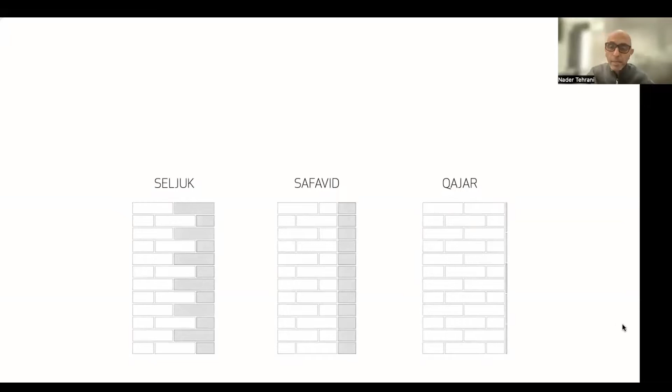I was once asked, what does all of this have to do with my own personal history as an Iranian? And I had little to offer at that moment, but in looking more deeply at the history of the Seljuk period, the Safavid period, and the Qajars, I discovered an interesting relationship between structure and skin, and the ways in which structure can essentially evoke ornament itself through the inner workings of its structural constitution in the Seljuk period, how in the Safavid period that structural layer becomes a skin, and by the time of the Qajar period, literally just becomes a tile. These were important evolutions because they also show a transformation in ethic.

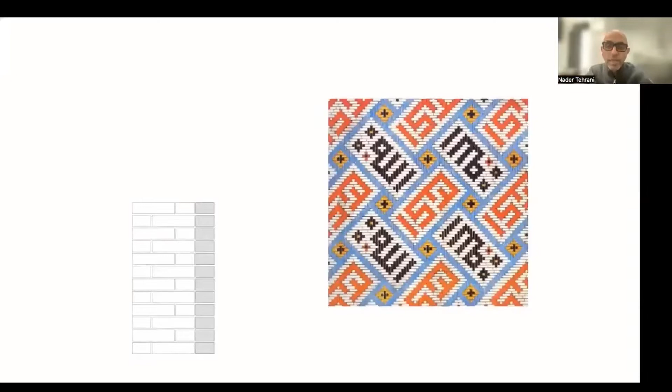In the first phase, the calligraphic ornament becomes an alternative to figurative representation of the Western world, and during the Safavid period essentially takes on certain colors and different modalities. And then by the time it gets to the later period of the Qajars and beyond, you can even see the grid of the tile being completely independent of the constitution of the wall itself.

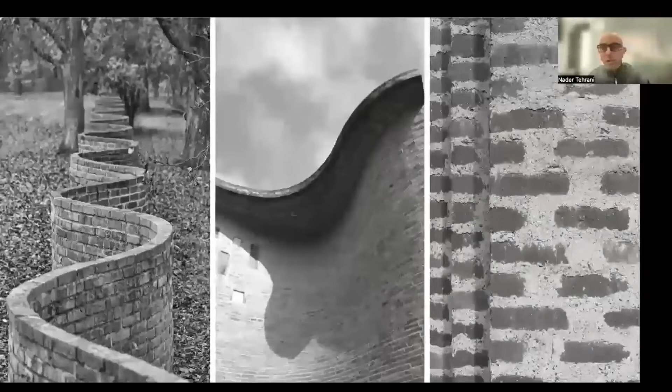All of this composed of raw material, a resource from the earth itself, and of course here refashioned in the sinuous serpentine walls of the University of Virginia and the Dieste walls of the Atlantida Church in South America. And here to the right, the infamous bonding system that shows how sometimes the mortar is the key protagonist rather than the brick itself.

And this became an idea for us to develop an approach towards means and methods where we're not just designing the image of the building, but beginning to refashion the way that we build, which is very much at the core of these workshop activities, to rethink a certain material, but also the labor processes. In traveling to Venezuela, we discovered tiles, blocks, and bricks, and they became the precondition for us to work with: the tiles on the roof, the bricks on the side wall, and the blocks on the front facade.

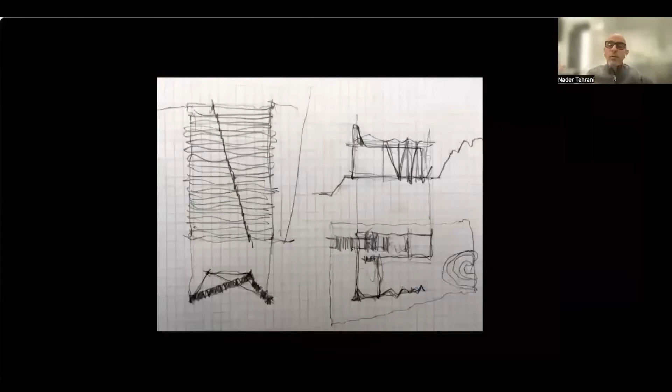And recognizing that there are really two very different ways of thinking about figuration. On the left side, you can see that the figures that emerge from the brick are completely independent of the bonding system, whereas the more abstract and sinuous evocations of figure on the right emerge directly from the relief work within the brick itself, and we wanted to participate in both modalities.

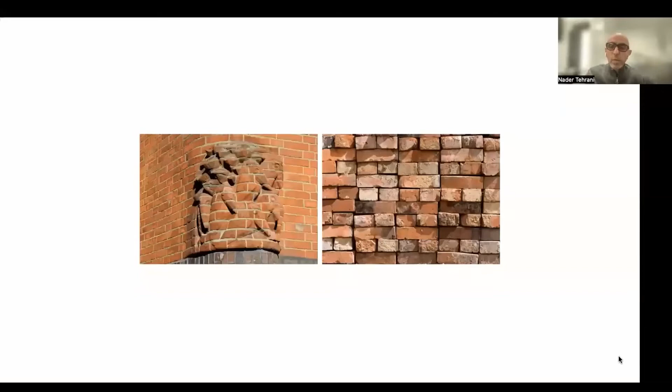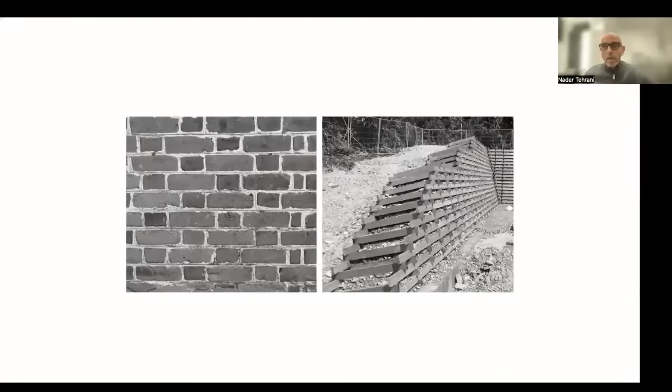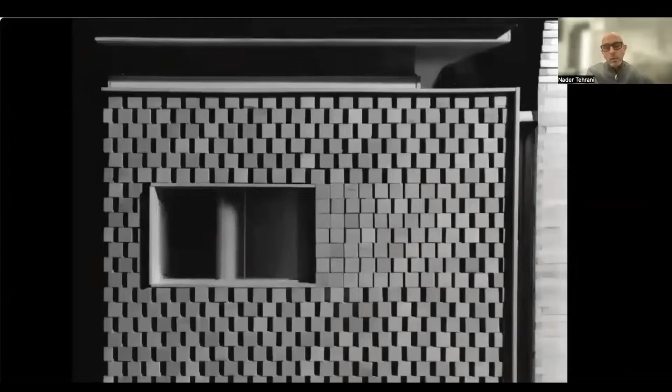But importantly, by interpreting the mortar as a variable condition, we discovered what we called the variable bond, where we oscillated the mortar line between a running bond and a Flemish bond to produce a gradient, as it were, that could slip and slide and produce conditions of porosity and rotation where solid walls become more transparent.

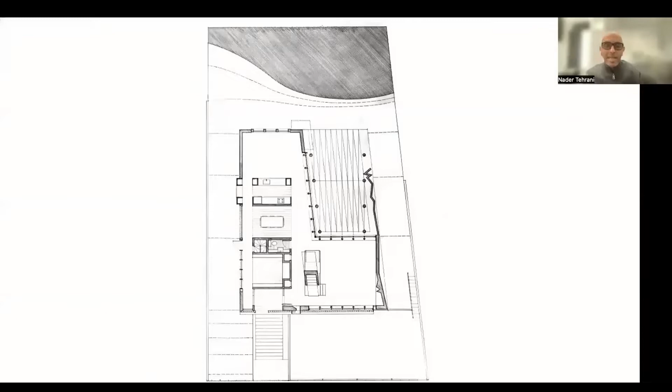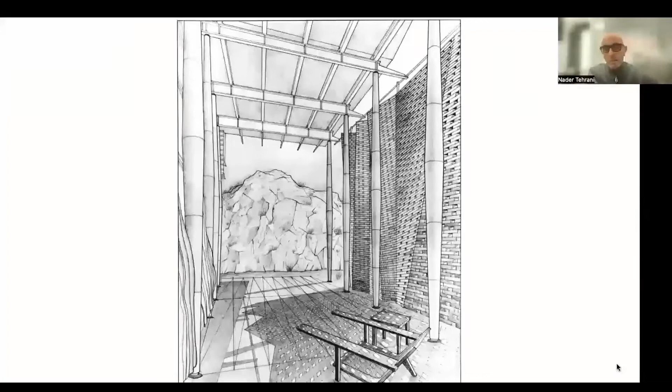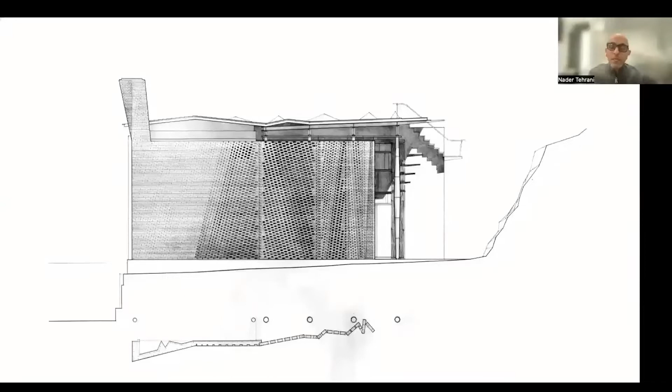And this was an important moment in developing Casa La Roca, a house dedicated to a court whose view is of an existing rock some 20 feet tall in the back garden that needed some shielding from the neighbors to the right. That folded wall on the right-hand side really is the topic of this discussion, because we had to come up with a tectonic constructed around the fold itself, minimizing the cuts of brick while giving it lateral bracing through the folds. All of this in a house dedicated to a promenade that goes up the building to the roof to get a view of the valley of Caracas below.

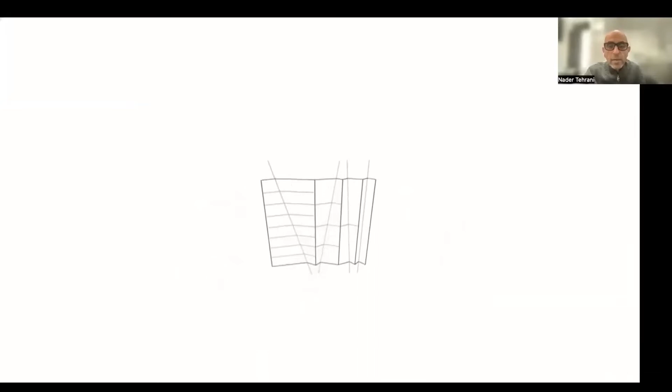So the folding emerges from a diagonal bonding system that is able to expand and contract parametrically, as it were, to produce the side elevation. By doing this, the regulating lines are essentially constructed on the diagonals, therein constructing an integral relationship between geometry and construction itself.

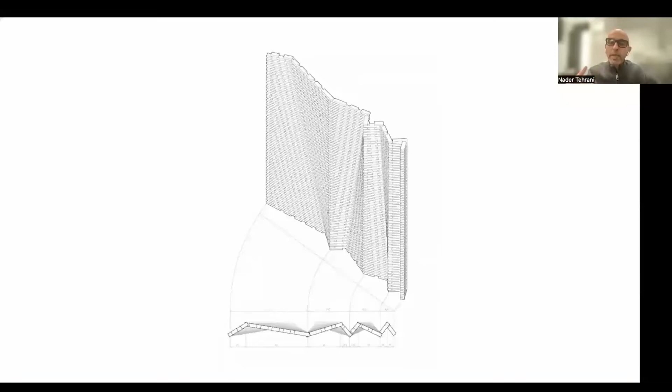Note that the geometry of the bottom is exactly the inverse of the geometry at the top, as the diagonal line essentially pixelates a ruled surface going from the bottom to the top. And by doing so, allows for the passage of air and light into what is essentially a laterally braced wall. The premise is constructed around the development of certain points in a running bond system here, and by expanding and contracting the mortar line, the production of air in between.

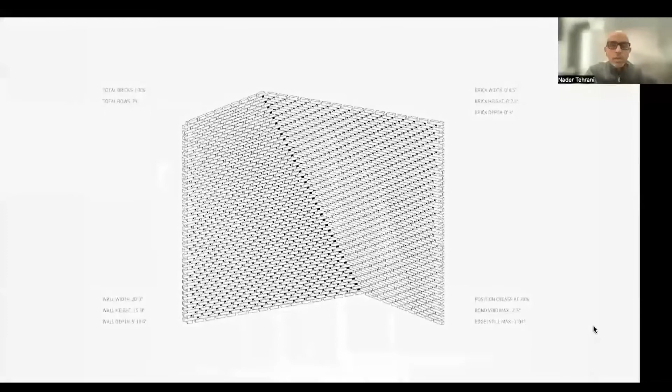The wall then is allowed to migrate, bend, fold back and forth as needed. And essentially, the constitution of the wall is then described by a structural skin. And so the curtain-like effect is not merely representational, it is constitutional to the wall itself. And so there is a sense of its diaphanous figure, but the reality is that it's absolutely rigid and structural

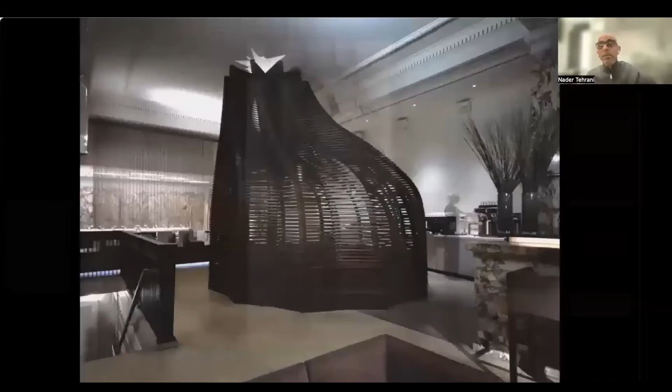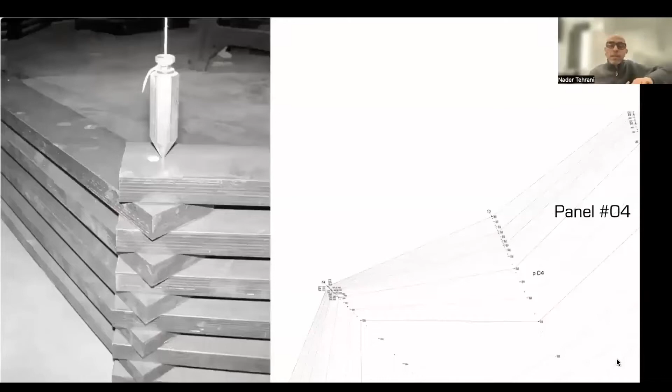and static. The house, never having been built, was then translated actually not into a terracotta system, but a wood system in the hookah den for Mantra, a kind of jali screen that has a star-like figure at the top and almost a circular figure at the bottom, for which we ourselves developed the means and methods, essentially by pinning the drawing up on the ceiling, dropping plumb bobs, and getting within a 16th inch of a tolerance as we stacked, glued, and screwed the pieces together of plywood, but really of a masonry logic.

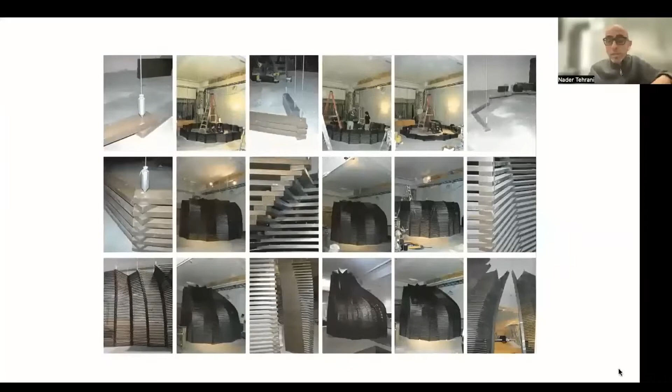And realizing that by doing that, we had cut off over $100,000 of the budget that the contractor had reserved for this structure. We had built this ourselves. It was our first construction job. It was our first full-scale mock-up. That was the building itself. And so our adventures into means and methods and fabrication really started at this point.

But this had to also be translated into a larger scale. At the scale of buildings here, we were interested in translating our obsession with terracotta, clay, and bonding into a building here, the Tongxian Art Center, where the figures of distortion are informed by the necessity for slopes for drainage, for the Venturi effect of a chimney, or the need for skylights, or the circulation that goes underneath a stair.

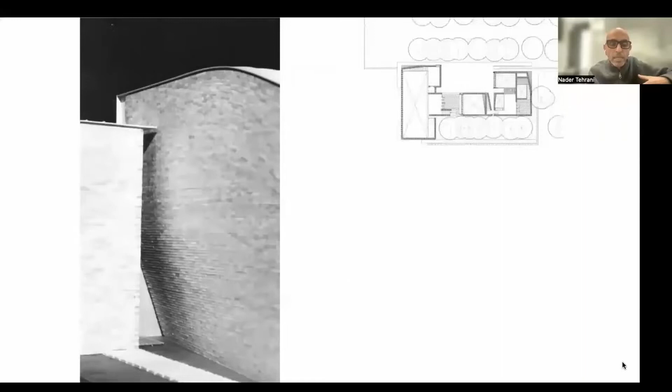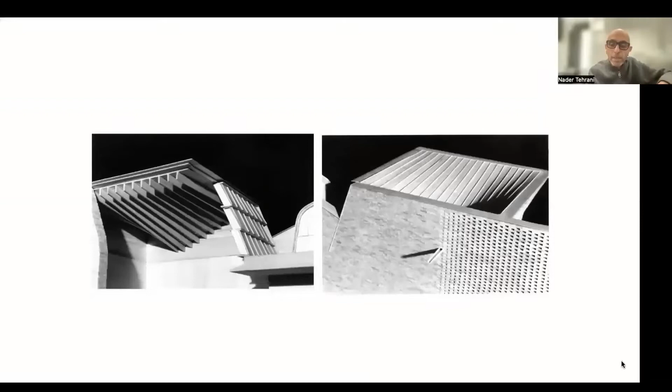For a complex that is just outside of Beijing, a series of studios, galleries, and courtyards, the full extent of this variable bond was exercised here, really focused on the minimal spaces that one could carve essentially out from underneath the stairs. As they rise, the headspace underneath gives way to some of these spaces of circulation underneath. In turn, roofing drains also find their way into downspouts and spouts that exit the building in different ways, using the bonding system as a trigger for their tectonics.

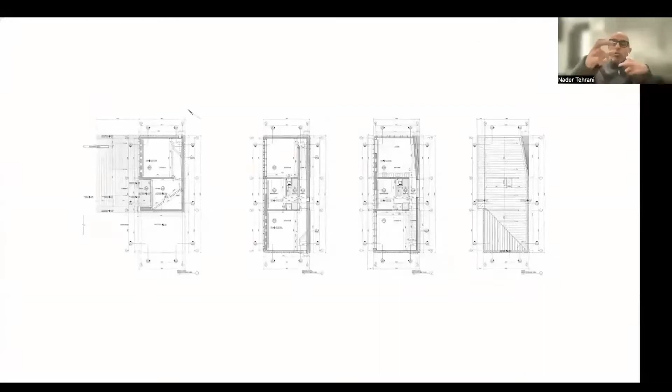The actual building that eventually got built was only the gatehouse, a structure that is essentially 2 studios and a staircase, and was built around the Roman model, where the brickwork becomes the formwork for the insulation and the concrete, and then gets stacked up accordingly.

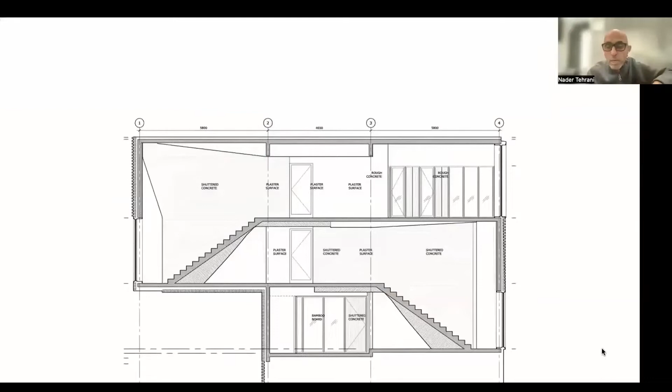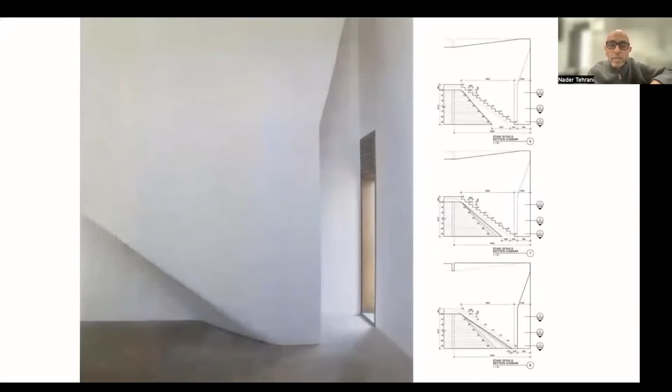And so the gate effectively becomes an incomplete cube, carving out the passage of the threshold on one side, and mirroring essentially the promenade that is the diagram of the circulation going up the building, allowing for the corridor and the stair to occupy the same space. So one weaves in a figure 8 from one side to the other side, constantly going around the underbelly of a stair and then up the stairs to the final destination of the roof, where the common area is that overlooks the gardens.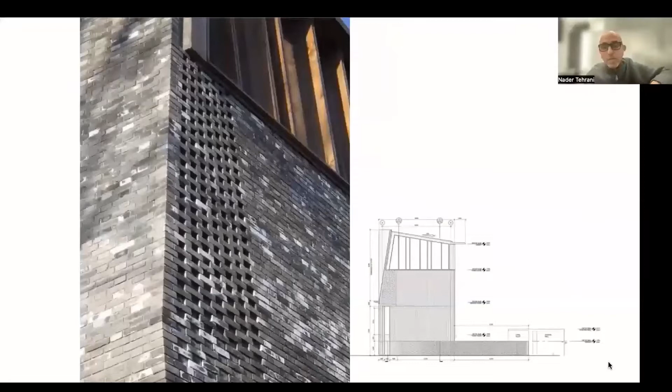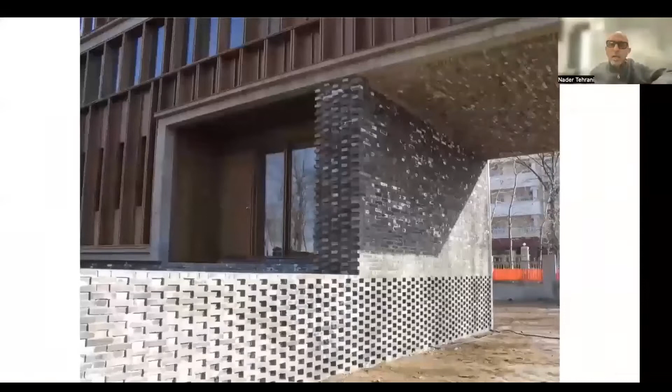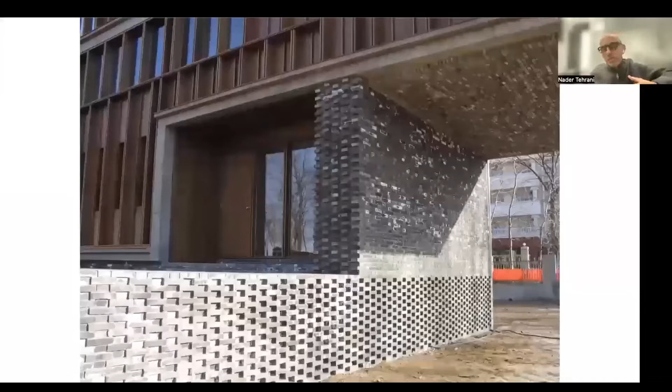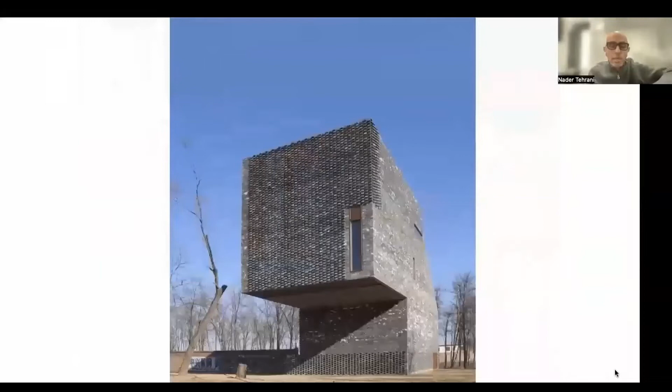And here then the figure is made clear, such that the compression of the variable bond system tilts in relationship to the roof itself, the necessary slope it requires to expel the water out onto the garden side. And here, recognizing that this is not in fact merely a brick building, but really a brick skin that is the formwork for a concrete structure, allowing for this composite structure to cantilever over 20 feet in one direction, and using the Flemish bond to excavate voids out of it for the mechanical systems underneath, among other kinds of distortions that it requires as it figures itself in the landscape.

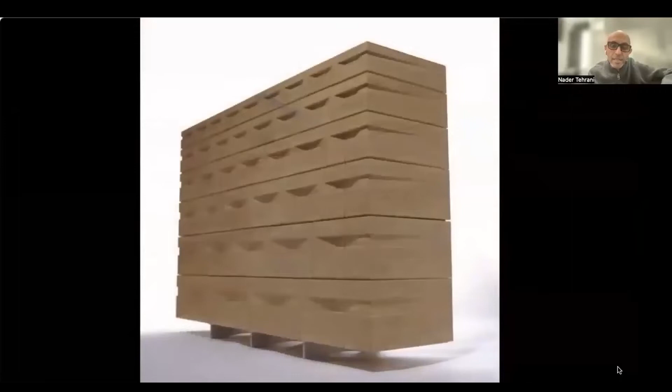The idea of this masonry system, of course, we've used as follies in different ways here, just as a little exercise, a dresser that we designed concurrently with that conceals the structure only to reveal the running bond masonry system of the wood that magically cantilevers out, using the logic of masonry to do such.

Behind all of this is a premise, what I call the tectonic grain, and it's something we borrow, let's say, from nature here in the context of a zebra. Its striping is acquiring a certain meaning in relationship to its torso and legs. Of course, everybody knows that this is not actually how the grain works in a zebra. In fact, the striping is always perpendicular to the limb as well as the torso, and the architecture of it is in turning the corners between the two.

But what you and I do as architects is artificial, and so we are constructing grains constantly, and our architecture is always in a state of debate between the actuality of construction on the one hand and the image, the representation thereof, within the context

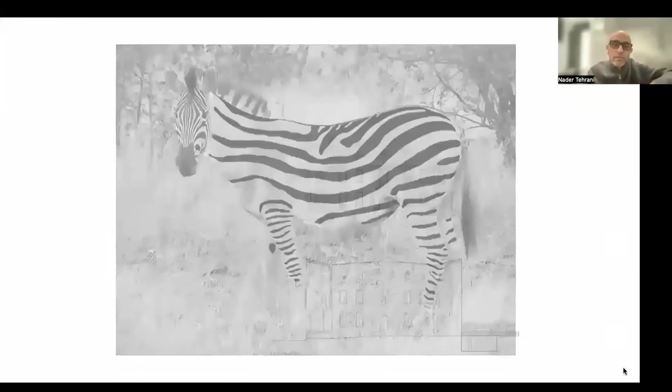of buildings. So this brings us to the Rock Creek House, which, interestingly enough, was a traditional Neo-Georgian house depicted above. A family wanted to stay in the house as it was expanding. They went from 1 to 2 to 3 kids and simply wanted to remain in the neighborhood and remain with their friends.

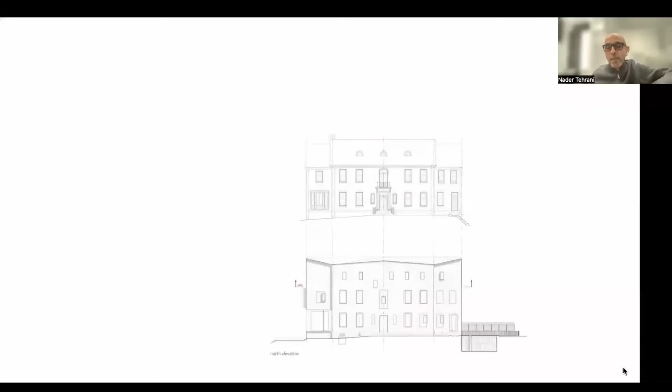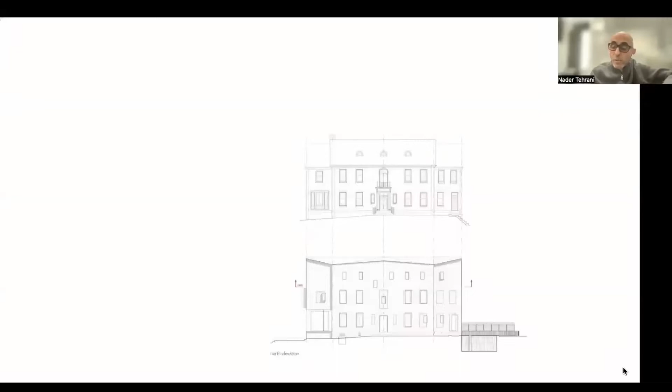And so to use the attic space as an addition. But to do so, they wanted to also excavate southern exposure on one side and use the excavated brick of that southern exposure to build the facade of the north. So essentially a kind of cut and fill operation. So the load-bearing brick construction of the north maintains a vestige of its original image with its windows more or less intact in place, a slightly new roof line, of course, occupied by the new attic.

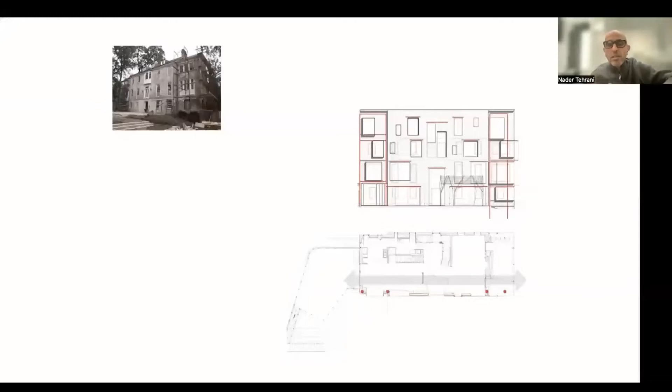But in contrast, the whole southern wall is taken over with a lot of steel, almost like a Frankenstein, it's a curtain wall that takes over on the south, allowing for what is ostensibly a very porous relationship with interiors, the random figures of which correspond to the exact new distribution of bedrooms and living rooms and staircases and so forth. And so these two characteristics of the building in brick, one in load-bearing condition, the other one in curtain wall with a side elevation making that transition.

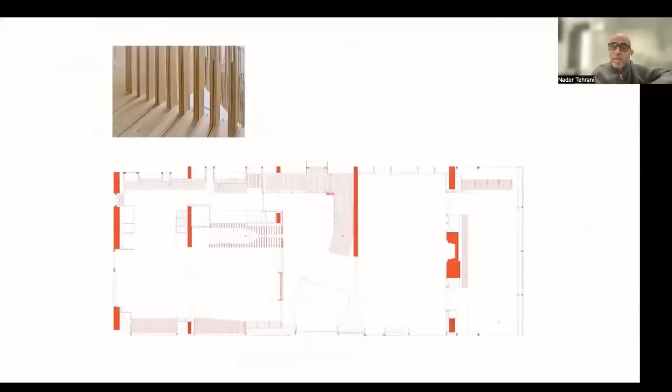Allowing also the millwork of the interior to come into full exposure from the landscape side. The building then is composed of certain structural walls, almost like party walls between its different sections, and the millwork is part of that tectonic grain. It extends that logic north-south, allowing the light from the south to come all the way through the north. You can see it through the pickets of the railing with the kind of flat stacked panel work on the east and west sides. In a way, they emulate what the brick is doing through wood construction.

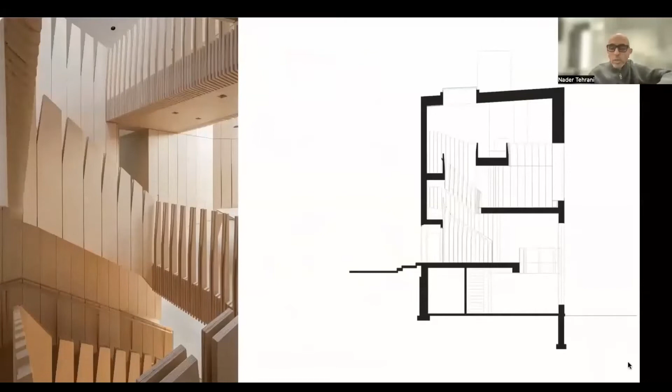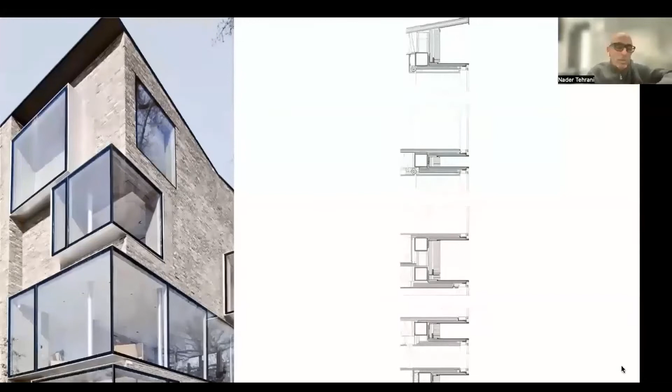But then allowing the brick to turn the corners in dialogue with a glass detail that renders ambiguous moments of depth and thinness. In fact, these are not just windows, they're fully inhabitable spaces in the space of the curtain wall, where the brick is not so much rendered thin, but massive. And so these deep spaces become seats, chaises longues, and other areas that mediate between the inside and the outside. And the building then occupies the formality of the symmetry of the front facade to the right, but the informality of the backside as it opens out over the views of Washington, D.C.

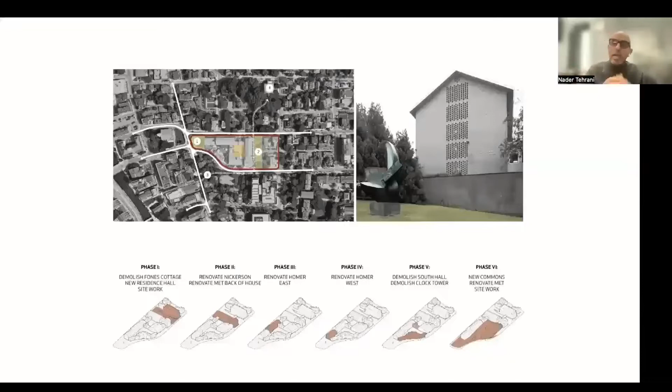This obsession with brick, of course, becomes, let's say, much more mediated in the context of urban design projects and institutional projects. In this case, the Rhode Island School of Design, where the identity of the campus is in correspondent dialogue with the character of Providence itself, the brick becoming essentially a message of history, and in some ways, a diplomatic act to bring a building into its context.

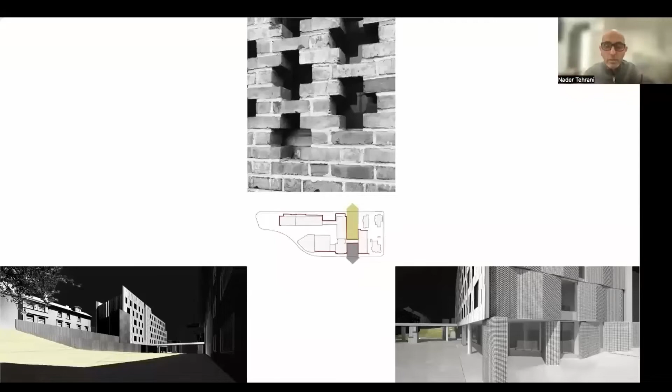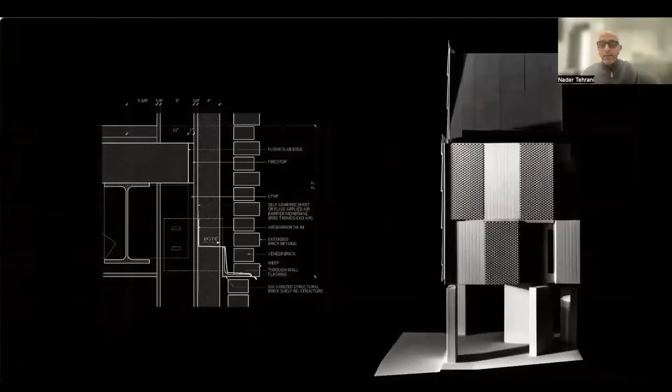In our case, North Hall had to take up a significant size and scale on top of Prospect Hill. And so the brick was used as a kind of liner of retaining walls that define a new Nickerson green, but also a south facade that establishes a new frontal elevation in relationship to Waterman Street. Here, evoking the original brick with its own bonding system, we instead develop a veneer system. By definition, everything is veneer these days, but how to produce the effect of depth when you know you only have a veneer to work with.

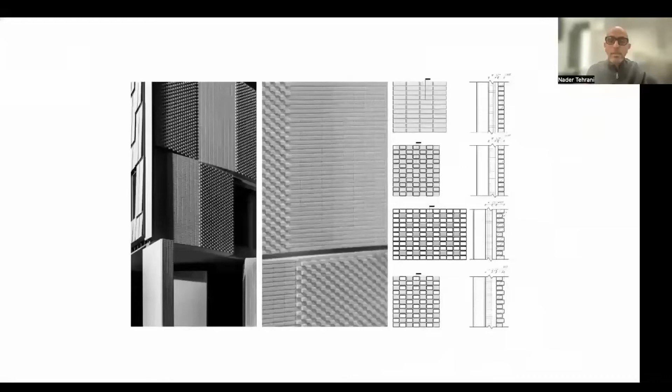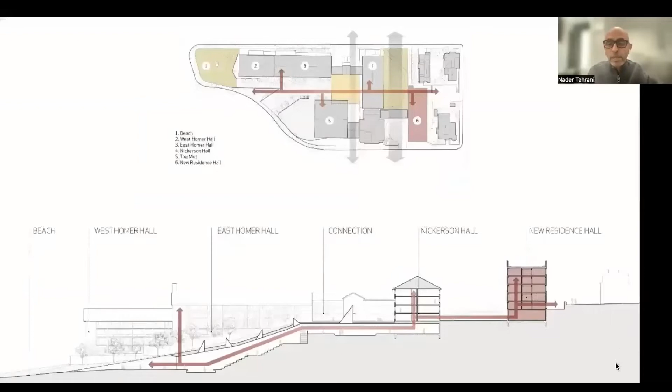And so the paneling systems both corbel out and get carved in as a mechanism to establish the placement of this new building that would otherwise be thin, but has to be in dialogue with buildings of the 1800s and 1900s to create this new urban connection between Brown University and the RISD Woods-Gerry building. In tandem with that, a kind of monolithic colossal colonnade evoking the logo of RISD itself, amongst which you walk as you enter the building at a colossal scale.

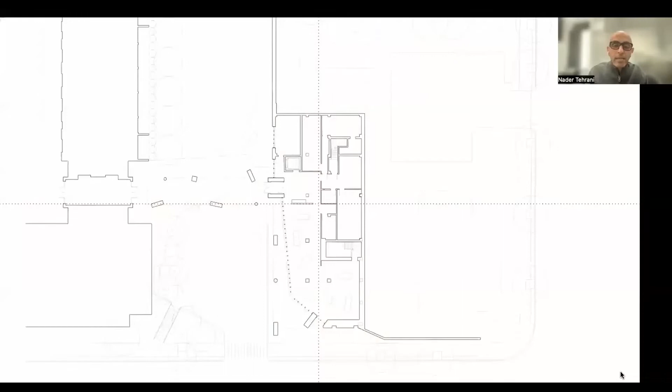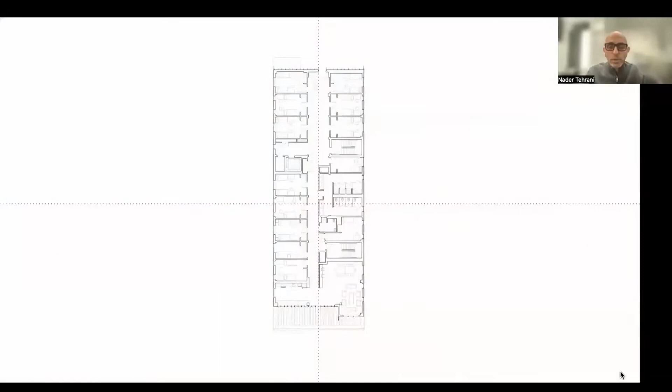The building is excavated at the base for the public spaces, but then it creates a deep and thick wall on the south that takes advantage of the southern light to produce a depth it doesn't actually have. Note the building on the left side, which is from the 80s, that effectively paints on the brick in one layer. Our building instead attempts to carve out of the 9-12 inches every bit of corbelling that we can get to give an illusion of mass and weight where there is none. And part of this has to do with the way in which we establish volumes, but also ways in which skin and volumes come into dialogue with each other.

You can see the top of the building where the vertical battens are somehow in dialogue with the vertical and horizontal siding of the neighborhood, whereas the brick with the bases of other buildings. Please note that, of course, this is a wood building.

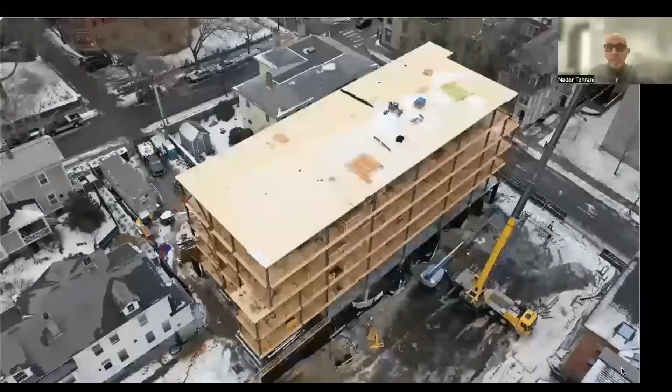And the irony is that we were able to fabricate this building 3 months faster than normal because it was all prefabricated. And because of that, there was very little waste in the construction site. You can see the cleanliness of the site as the pre-drilling of the I-beams and the mechanical systems were almost in place and become part of the embodied experience of the building itself.

The idea that a natural resource like brick comes from the earth is then exercised in a completely different way in southern France in a project that is a house, but is more than anything a landscape project. It is a garden. It is a space on the side of a hill in Ramatuelle overlooking the Mediterranean, and because of certain setback rules needs to step back with a certain cadence.

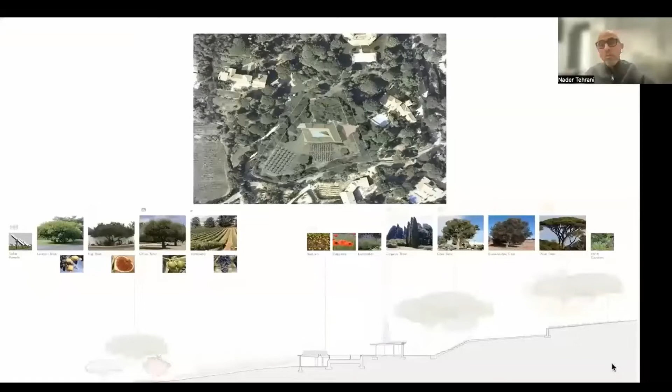But this gave us the opportunity not so much to work in brick, but to work with the clay of the earth itself, radically cutting into that earth in order to create the building. It is a violent act. Indeed, we also had to figure out a way to stagger the building so that it would essentially save the trees, but make a landscape building that terraces up into the site.

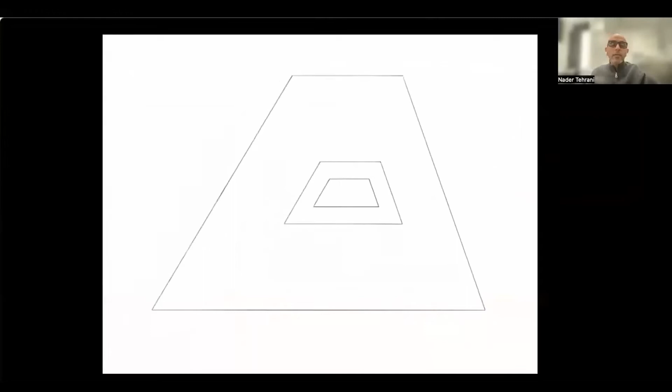The diagram of the building is as such. The building plan distorts to maximize the panoramic views on one side and the focal views on the opposite side. What would have been an internalized courtyard building gets terraced into an open court as it slopes and opens to the view towards the Mediterranean.

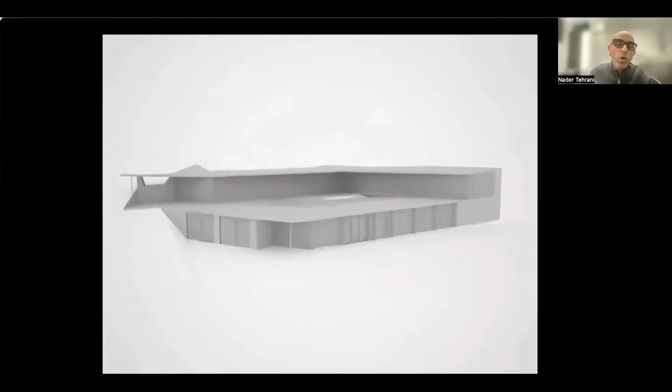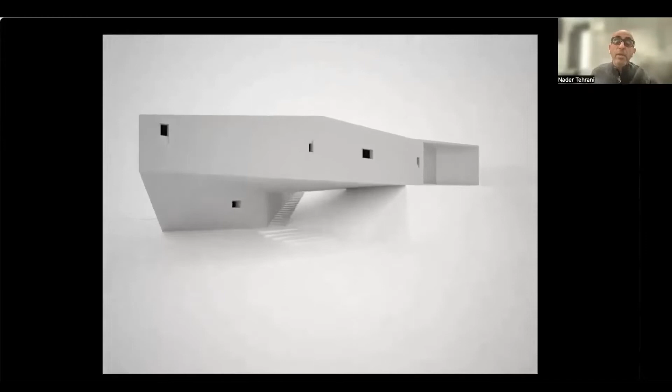And then the roof line opens up to the west, to the Pinus Pinea on the opposite side. And then the landscape is drawn into the gateway, into the building, up into the living areas and beyond, up towards the west. The earth of this building, indeed, is not so much brick, but concrete. The aggregate of that very ground is the substance of this building.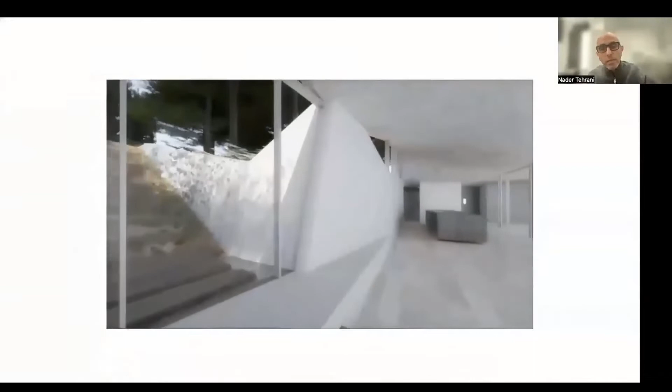Now, we had fashioned many other ways of fabricating this building, because we had thought that the aggregate may play a much more vocal role in constituting this. In fact, we developed a logic where the interior pours would be smooth, and then we might add aggregates of different sizes in different cast panels as we go up, so that by the time that you are in the landscape itself, you have a virtual stone wall in and of itself, naturally very customized and challenging to fabricate.

The idea was shelved, but we went back to the idea of the means and methods and how the formwork itself could take on a much more vocal role in the context of concrete. Here, using the warmth of that aggregate, of that earth, to evoke the sensation of wood by sandblasting that wood and casting that concrete within the board formwork that you see here, with the natural color of that concrete evoking a sense of a wooden building.

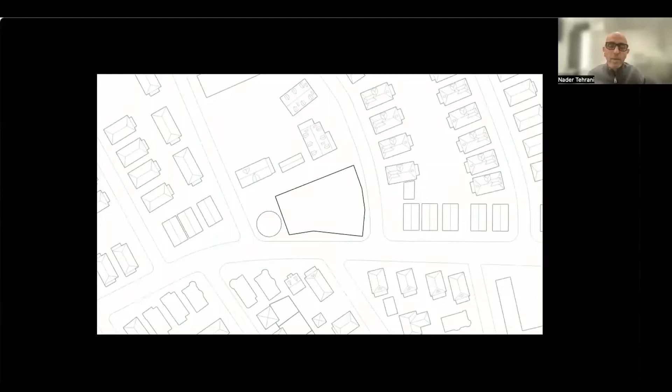As we then transition from this concrete building and its sinuous roof, we also had the opportunity to work in Dorchester, Massachusetts, on the Adams Library, a building that needs to mediate between the public and the private realm in a local suburb.

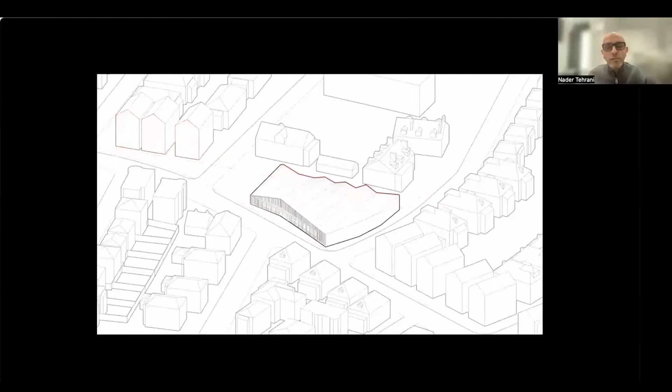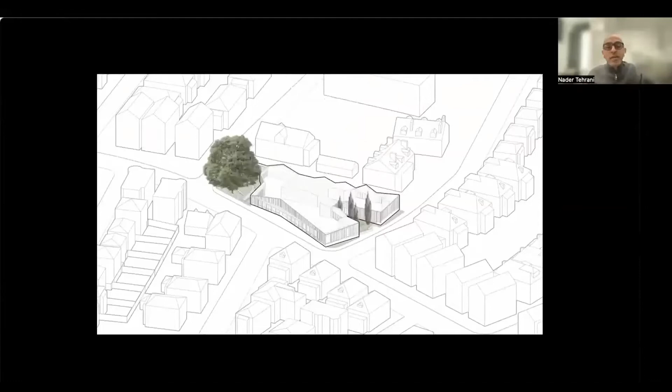The logic of this building is to give a civic front on one side of the building, while encouraging a more domestic promenade on the backside that emulates the roof line of the context itself. Then using the roof as a fifth facade, because all of the buildings are taller and look down on it, bringing all of the water hydrology of the site to a kind of garden in the back, while taking a new courtyard space in the front and putting its program to the north to frame an existing oak tree that we were able to save on the north part of the site.

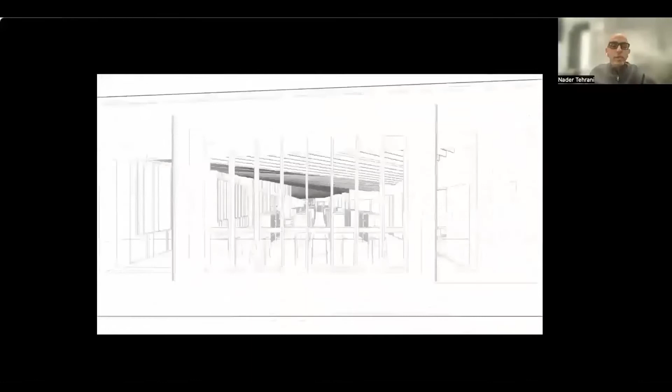Now, while the shelving is running north-south, the roofing beams are running east-west. And this is a kind of laminar condition that one experiences as one enters into this building, into the organization of the building, and effectively frame some of the more civic experiences, such as the reading garden in the north.

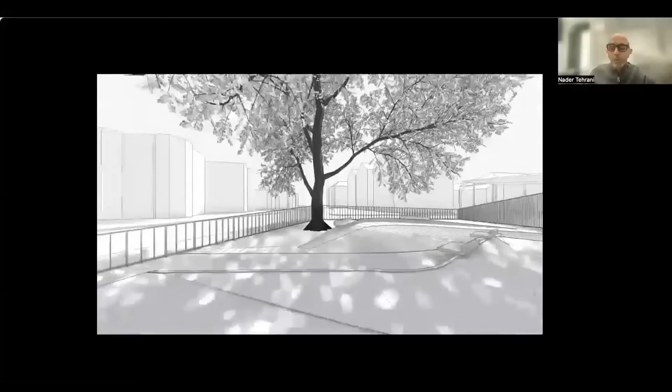The building is then essentially composed of terracotta panels in its entirety, evoking a kind of depth of the fluting you see of the Doric order, but while maintaining a strict horizontal monumentality on one side and the breakup of the roof line on the opposite side.

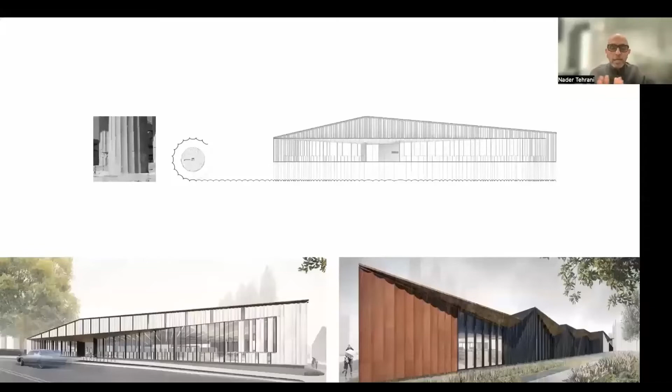These two facades bookend the site and allow for a completely different kind of reading for the two sides. The scalloping that you see here is evocative of the depth of a loading condition that this building doesn't have, because in fact it's a rain screen.

On gray days, it is rather flat and mute, and on sunny days, of course, it is deeply scalloped and ornamented as a consequence of it, but it draws from a custom profile that is able to be used to create what are called brick-sided buildings. This is a tradition specific to New England, where sometimes brick was used as sidewalls when they're close to other buildings to create a firewall, or alternatively, where there wasn't enough budget to go from stone all around the building. One went from stone to wood or to brick.

And essentially it's a tectonic that is almost like wallpaper. It has no tectonic veracity. It is a moment where two architectures meet at a line and describe the different facets of the neighborhood. And this is a building that very much as a skin evokes that thin line between the neighborhood and the main street, the garden, and the street.

And so within the context of this construction, each face gains its own identity as it travels around, using the colors of terracotta, classical terracotta, to create essentially a landscape that is not only in the facades, but also in the reflected ceiling plan. The reflected ceiling plan, composed here of wood and acoustic panels, essentially is a striation of the beams that connects the east and the west. Here, the monumental civic side on one elevation, and here, the broken down elevation of the opposite side from the interior.

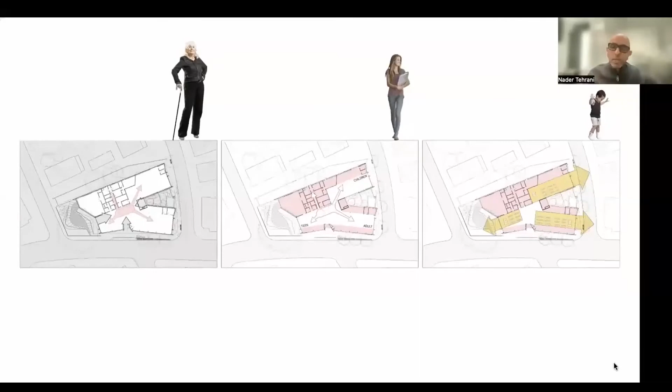The plan is rather simple, actually, that it has an adult section, an adolescent section, a children's section, and they're all divided into three parts, with the poche areas in pink being service areas. An organic plan that is the result of a lot of community planning, but that then produces certain civic spaces that bring the weight and depth of the terracotta in evidence in the sun, but always to a blade's edge thinness on its sides.

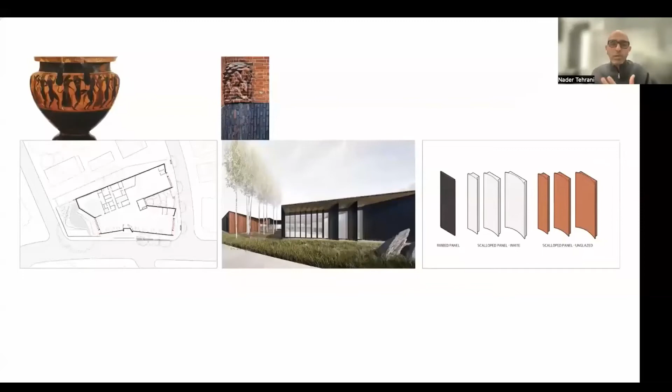Here, working with essentially Greek vases and a coloring of a kind of deep aubergine on one hand and the classic terracotta red on the other, and the white glazed tile on the other, to evoke a sense of formality in the front, a rawness in the courtyard, and a transitional burnt umber in certain carved areas. The sum of which produces, in fact, a very porous building that brings the library back into dialogue with its context.

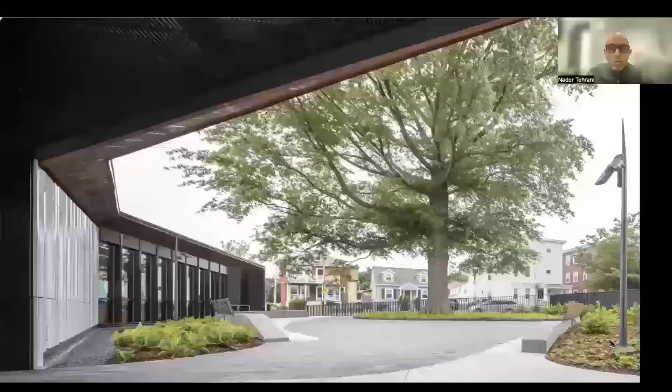So with that, I thank you all for the opportunity of speaking and bring essentially the talk to a close around not so much terracotta, but the way in which these technologies come into bearing on other messages. In RISD, the Nickerson Green, in Villa Varoise, a commitment to the landscape and the terracing of Ramatuelle. In this case, the saving of the oak tree was the big political act.

The idea that these are always in service of a larger sustainable message, and the idea that certain natural aspects of the site, not only the earth from which we gain the terracotta, but also the existing trees, the flora and the fauna, are part of the heritage to which we must respond.